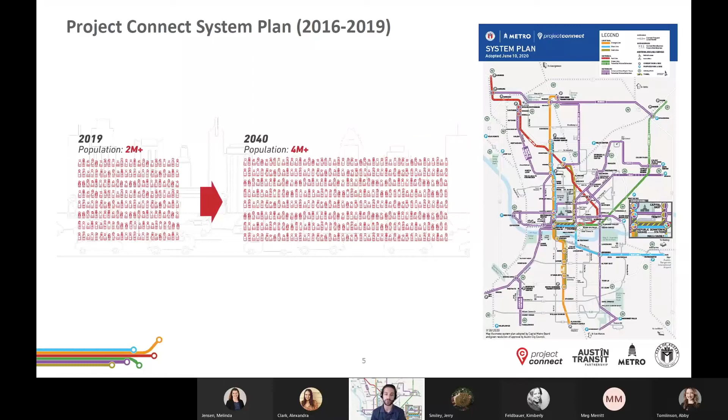The proposed Orange Line follows a 20-mile corridor currently served by Capital Metro's Metro Rapid Route 801 and extends from Tech Ridge Park and Ride in the northern part of the corridor to just north of Slaughter Lane on the southern end of the corridor, traveling along Lamar Boulevard and Congress Avenue. The Orange Line would serve as a spine of the regional HCT network and provide faster, more reliable transit connections.

In 2019 and 2020, Capital Metro conducted an alternatives analysis, or AA process, for the Orange Line corridor. The AA process used a phased approach and tiered screening process through which alternatives were defined, evaluated, and then refined or eliminated in each step. The AA provided information to decision makers and the public that helped the community evaluate costs, benefits, and ultimately develop a locally preferred alternative, or LPA, that would most effectively maximize the transit investment in the Orange Line corridor.

The LPA selection is represented by a combination of mode, transitway, and alignment choices that, when combined with the purpose and need of the project, is financially feasible and has strong local support.

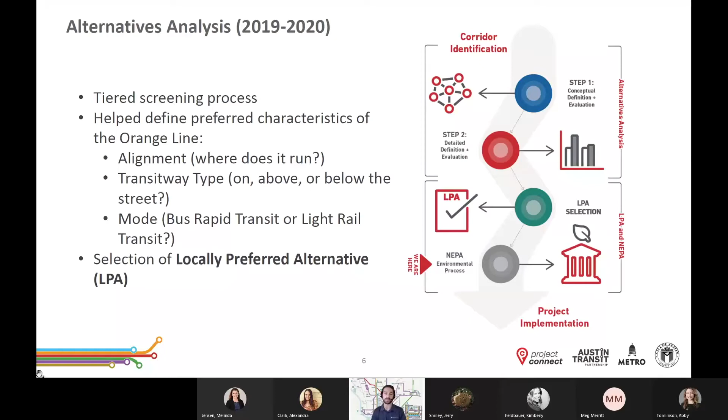The LPA for the Orange Line is defined as light rail transit, or LRT, operating in a dedicated transitway from Tech Ridge Park and Ride in the northern end of the corridor to just north of Slaughter Lane on the southern end of the corridor. 22 stations are proposed along the route. The placement of these facilities will be coordinated with the community. Service would operate about every 10 to 15 minutes.

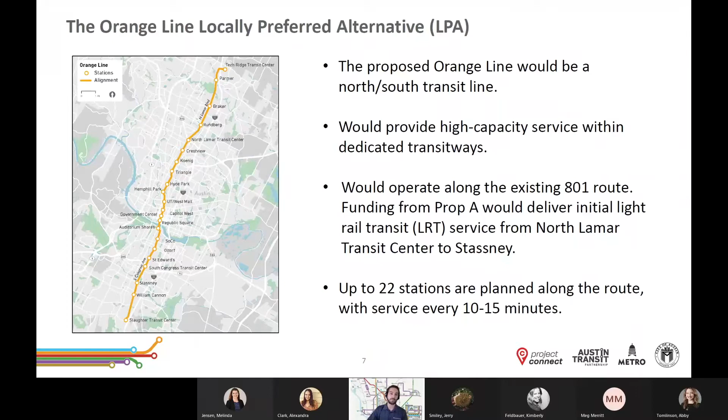The Orange Line would feature off-board fare collection, larger stations with level boarding, Americans with Disabilities Act or ADA accessibility, and intersection signal prioritization to allow trains to move faster. It would also provide significant travel time savings over the car in rush hour.

For example, the Orange Line would allow someone to reach Republic Square from Tech Ridge in about half the time compared to peak rush hour travel in a car. Additionally, it would provide environmental benefits through a reduction in vehicle miles traveled and a reduction in greenhouse gas emissions.

The LPA was unanimously adopted by the Capital Metro Board of Directors and endorsed by Austin City Council on June 10, 2020. In November of 2020, the City of Austin voters approved an 8.75-cent tax rate increase to help fund the next phase of implementation for the system plan. This enables the Orange Line LPA to move into the next phase of development as the Orange Line project.

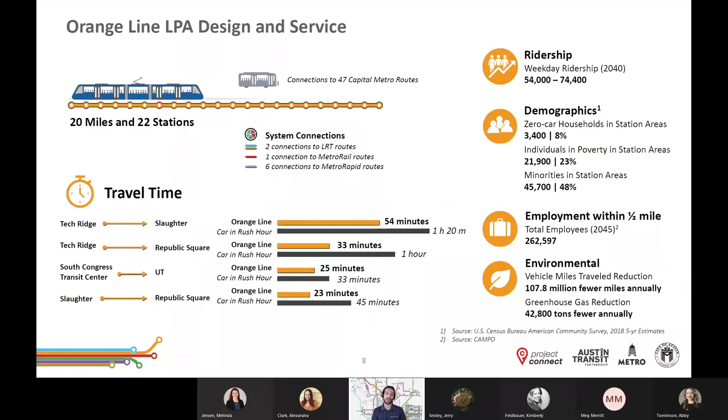So now that we've talked through how the Orange Line became the project it is today, we'd like to talk about what's happening now on the project and what will be happening over the next few years. For this, I'll hand it over to Jerry.

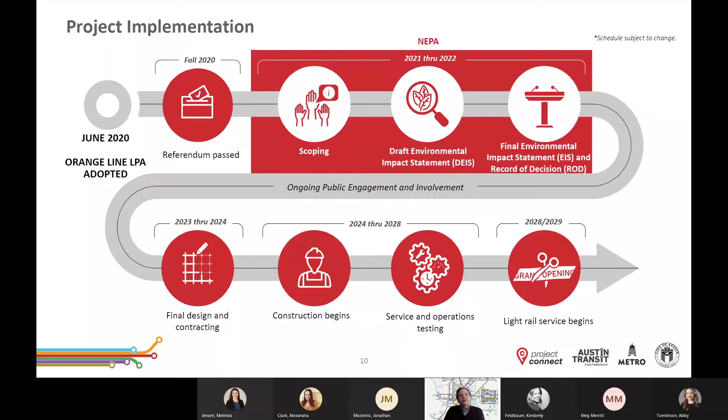This is the phase we'll focus on for the rest of this presentation. Following the NEPA process helps us learn more and better define the project. It allows the community to understand the project and guide development, and it ensures Capital Metro fulfills the requirements necessary to receive federal funding.

The NEPA process can be broken down into three distinct steps: scoping, the development of the draft environmental impact statement, or DEIS, and then the development of the final environmental impact statement, or EIS.

An important part of the scoping step, and the purpose of this series of scoping meetings, is to provide information to the community about the Orange Line and to establish an early and open process for obtaining public and agency input. We'll share information about the project and ask for your feedback, both now as part of this presentation and later through multiple comment submission options.

There's also a concurrent agency scoping process that allows our partners and other transportation agencies, like the City of Austin and Texas Department of Transportation and others, to coordinate and participate in the project scoping step.

Following the conclusion of the scoping phase, Capital Metro will begin working on the draft environmental impact statement to more fully assess the potential benefits and impacts of the project. The DEIS will describe the purpose and need for the Orange Line project, describe the alternatives considered, describe the affected environment, and describe the environmental consequences of the project.

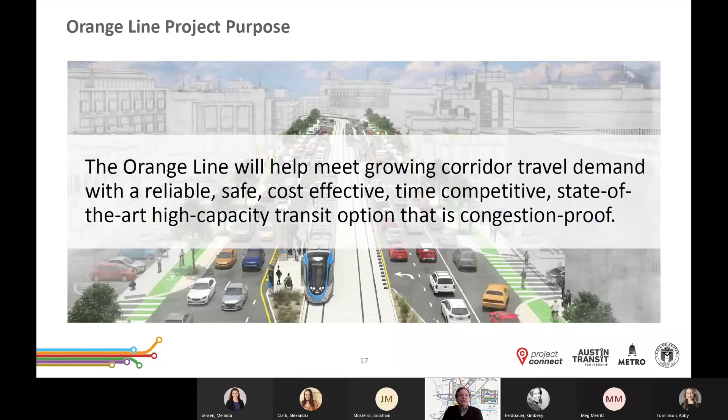The project needs statement answers the question: what problems is Capital Metro trying to solve with the proposed Orange Line project? These needs demonstrate specific outcomes associated with the project, including sustainably supporting Austin's population and economic growth, supporting growth and connectivity to activity centers, providing better transit options linking affordable housing and jobs, and increasing transportation network capacity to meet increasing travel demand.

The goals and objectives for the Orange Line are based on the goals established for the Project Connect Vision Plan and for the project's purpose and need. The goals are high level and mirror the project's needs, with objectives describing how we will meet each goal. These include customer experience, meaning the project should increase efficiency, attractiveness, and utilization of high-capacity transit service within the corridor.

Reliability means the project should provide frequent, reliable, high-capacity transit service along a dedicated transitway within the corridor. Sustainability means the project should contribute to a socially and environmentally sustainable transit network. Land use and policy means the project should support compact and connected land use development patterns.

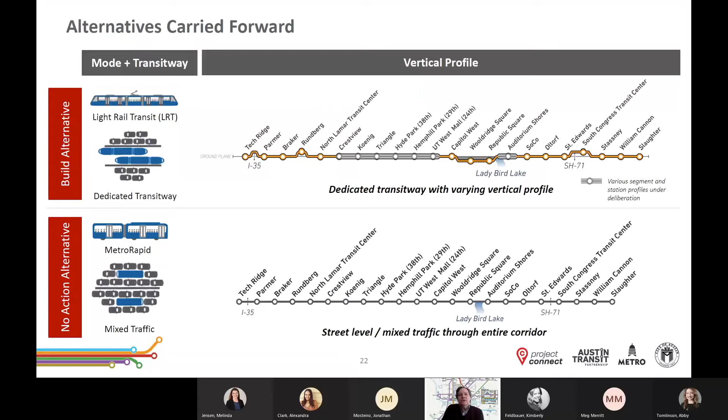Throughout the NEPA phase, Capital Metro will study two distinct alternatives. In addition to the build alternative, which would construct a light rail line in a dedicated transit way. We will study a no build, or no action, alternative, which includes MetroRapid operating at the street level and in mixed traffic throughout the entire corridor. This provides the baseline against which we evaluate the impacts and benefits of the light rail alternative, and we use it to determine the relative impacts, both positive and negative, of implementing the build alternative. The build alternative is the proposed Orange Line project described throughout the previous slides, which would add a light rail line in a dedicated transit way to the corridor.

To ensure the build alternative has a dedicated transit way, the vertical profile will vary. By vertical profile, we mean a technical term for where the transit way exists, either above, at, or below street level. We'll look at the build alternatives in more detail on the next slide.

This graphic shows the proposed build alternative in more detail. Each of the circles symbolizes a proposed Orange Line station, where the Orange Line follows the ground plane line, the build alternative is at street level. Where it arches above the ground plane line, the proposed station profile is above street level, or elevated. In some cases, this elevation would look like a bridge or go over other transportation infrastructure like I-35. In some areas where space is limited, these elevated sections may be longer than a typical bridge. Where the Orange Line dips below the ground plane line, the proposed station profile is underground in a tunnel.

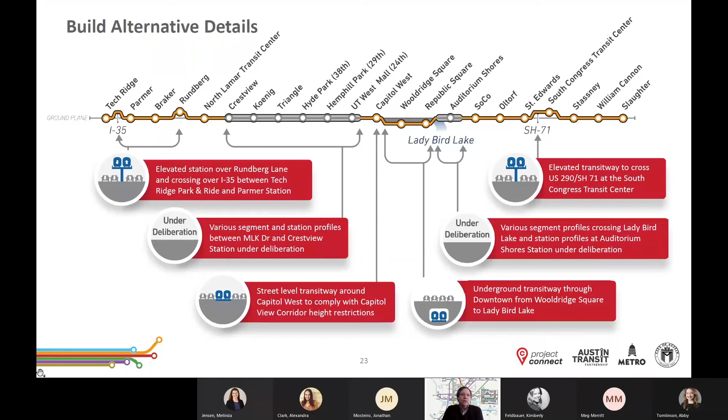The gray shading between Crestview and UT West Mall stations, between the Wooldridge Square and Republic Square stations, and in the areas of Auditorium Shores stations indicates that the station profile in these locations is still being determined. In addition to these areas, we will evaluate different logical termini to determine what parts of the project might be built first. Thanks for all your participation and hanging out with us so far.

Next, I'm going to ask Melinda to walk through the environmental resources that we'll be studying as part of the NEPA process. Melinda? Yeah, thank you, Jerry.

The NEPA process will also evaluate potential effects to the human and natural environments under the alternatives. In the NEPA process, these areas of potential effects are referred to as resources. The environmental resources to be analyzed include all of the resources shown on this slide.

Some of these resources are self-explanatory, but some are a little less so, and I've picked a few here to talk through in more detail. Section 4(f) refers to the evaluation of impacts to publicly owned spaces like public parks and recreation areas, or publicly or privately owned historic sites.

Environmental justice refers to the study of potential environmental, economic, and public health impacts on low-income, minority, and rural communities. Visual and aesthetic refers to the evaluation of how the project is seen by both users and neighbors. And noise and vibration refers to the evaluation of the noise and vibration caused by a transit system at nearby residences and other sensitive types of land use, referred to as sensitive receptors.

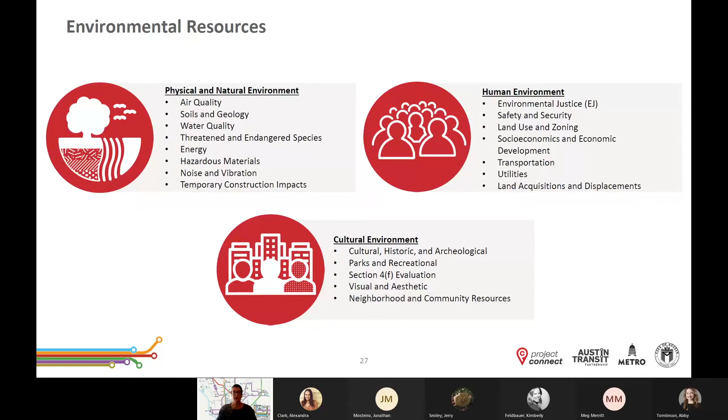The NEPA process provides guidance on how to assess and mitigate all of the resources shown on this slide.

So we've talked a lot about the process, now we're going to shift a little bit to talking about people. The NEPA process is specifically designed to facilitate coordination, review, and feedback between parties at all levels, from community members to the federal government.

We'll start by reviewing the core team here. The Federal Transit Administration is the federal lead agency in the NEPA process. Capital Metro is the sponsoring agency, and the City of Austin is the participating agency and a critical project partner.

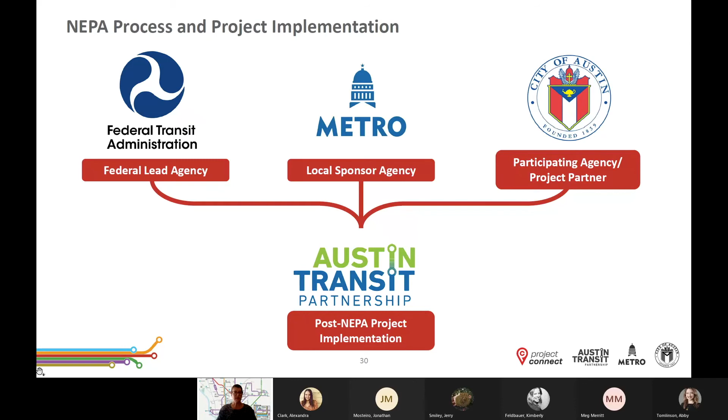The newly established independent organization called the Austin Transit Partnership is designed to guide the overall Project Connect investment and implementation after the NEPA process is complete. The Orange Line project would function as part of a local and regional transportation system.

Coordination with transportation partners across the system has been and will continue to be critical to project development. The core Orange Line team will work with local, state, and federal regulatory agencies throughout the NEPA process to receive input on the purpose and need for the project, the development of design alternatives, methods to define impacts, and identification of the preferred alternative.